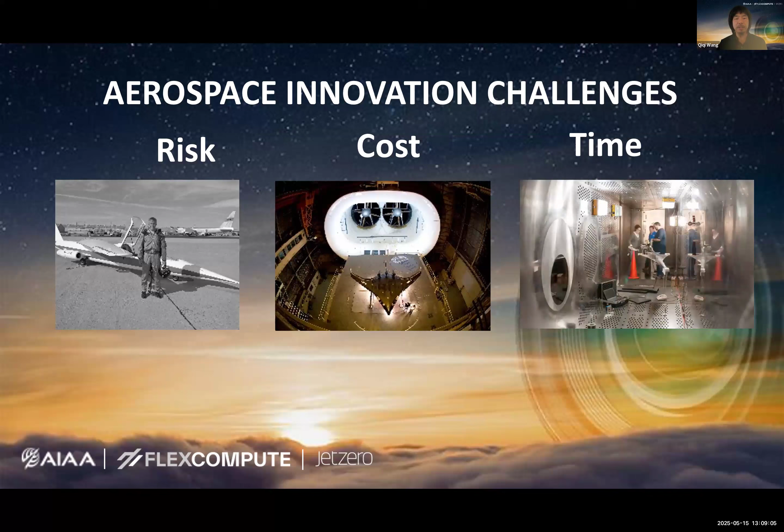The reason I figured was that aerospace innovation is really challenging. It is very risky. I mean, a lot of very good people lost their lives testing innovative airplanes. Innovation costs a lot of money, and those working on hardware understand that innovation in the aerospace industry just takes an enormous amount of time. And the dream here at Flexcompute is really to deal with risk, cost, and time in aerospace engineering. And the dream is to make aerospace innovation as easy as software innovation.

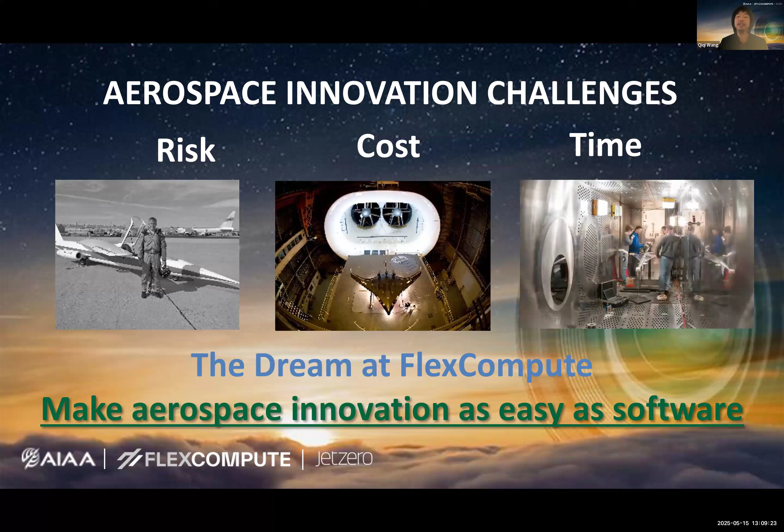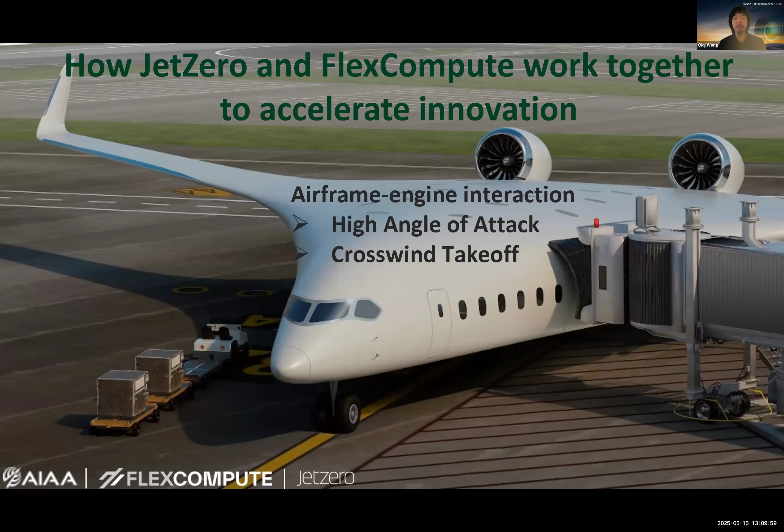So here, I'm just going to be using the example of our collaboration with JetZero to illustrate what we are doing to try to make aerospace innovation as easy as software. For example, a lot of innovation has huge advantages, but also has risks to address. What JetZero is doing, putting the engine at the back of the fuselage, has enormous advantages, but there are also questions to be answered, especially of airframe engine interaction. Is the engine ingesting separated flows at high angle of attack? And when would that happen? And how about crosswind takeoff? What is going to be the interaction with the boundary layer at the back of the fuselage?

So again, this highlights that what we do at Flexcompute, using the most innovative GPU technology, is to de-risk innovation, and as a result, accelerate design iterations of the methods of dealing with potential risks of innovative designs. And as a result of these fast design iterations, optimize the cost efficiency towards net zero. We're in a unique position to reduce the carbon emission of the product you design yourself and during the design process of running the simulations.

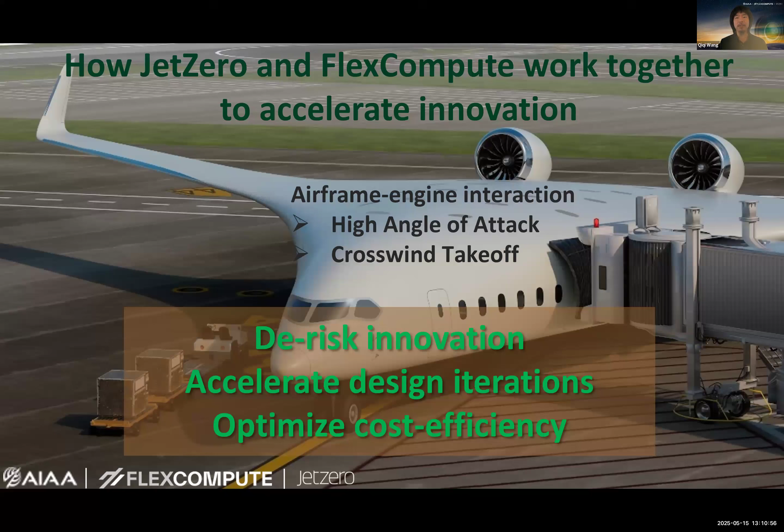So let's first get into airframe engine interaction at high angle of attack. This is something John Vassberg just had a phone conversation with me about one night, and we just figured, how about we run a fully unsteady simulation like this? Really, virtually inside our CFD simulation, test fly a 1/16 scale test vehicle as it pitches up, starting from a low angle of attack to higher and higher angle of attack.

So now you see that the flow separation actually starts from the trailing edge of the outboard wing, and as the airplane pitches up further, the separation moves towards the leading edge. And this is way after stall, which happens at around 14 to 15 degrees angle of attack, before the separated flow gets massively ingested by the engine of this 1/16 scale test vehicle. So doing simulations like that really helps figure out the risks of innovative designs like that, and get the solution ready before the full-scale vehicle actually shows any phenomenon that needs to be dealt with. And this work is done by Thomas, who is shown over here.

And the same goes for the next work, which is the engine installation effect at the crosswind takeoff condition. So this is another simulation done by Thomas of how the engine operates when sitting on the ground, which means there is no forward speed of the engine, but there is high crosswind coming from the side, and the engine operates at takeoff thrust conditions.

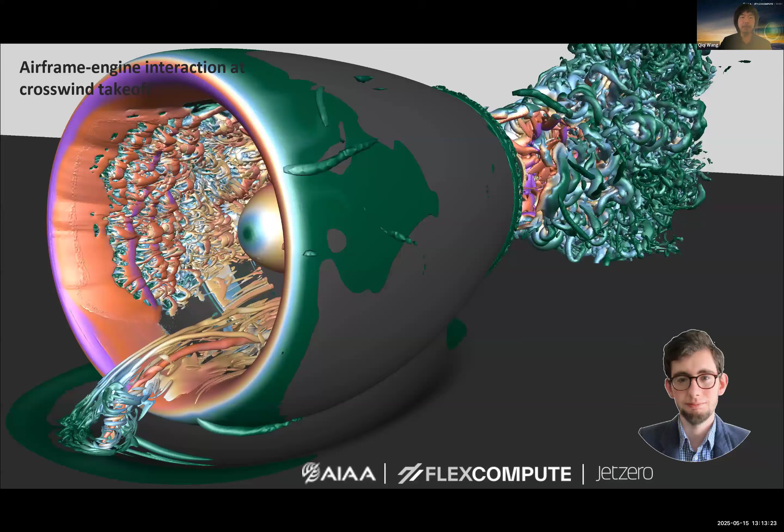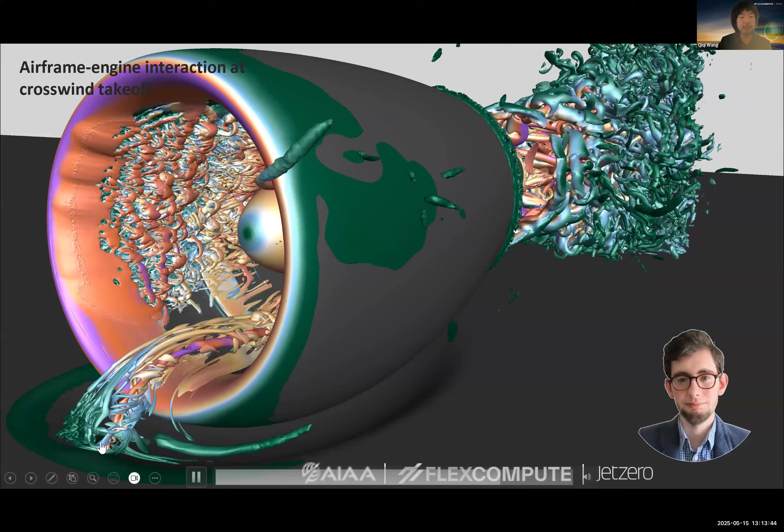And we here have a more zoomed in view of what is happening. As you can see, there is still one strong vortex at the center. If you look very carefully at the purple vortex, it's a very strong vortex that gets sucked into the engine, and that vortex also dances around. Around these very strong vortices, there is also a system of weaker vortices that also gets swirled into the jet

engine. And doing this kind of simulation helps us quantify exactly how big the potential problem is, and very quickly design our system away from any problem that might be harmful. And having a GPU-native simulation, sorry? Qiqi, do you mind if I interject a couple things here?

Of course, go ahead. Yes, so what we saw in the previous animation with the aircraft, that was our 1/16 scale low Reynolds number vehicle. The airfoil stack on that is nothing similar to what we're actually flying for the full-scale demonstrator. But we have this opportunity to look at the flow separation patterns, and we'll be using this model to test out vortex generator patterns as well as vortilons to figure out how to control our stall characteristics and post-stall characteristics.

If we go back to the propulsion animation here, we knew that this was going to be an issue, so we started looking at this problem even before we started collaborating with Flexcompute. But simulations like this show us the issue, and then we go and invent technology to go tame this issue, which we have done. We won't be showing that here today, but these are the type of simulations that a lot of people in the industry don't realize that you have to do to get an airplane with some operational capability.

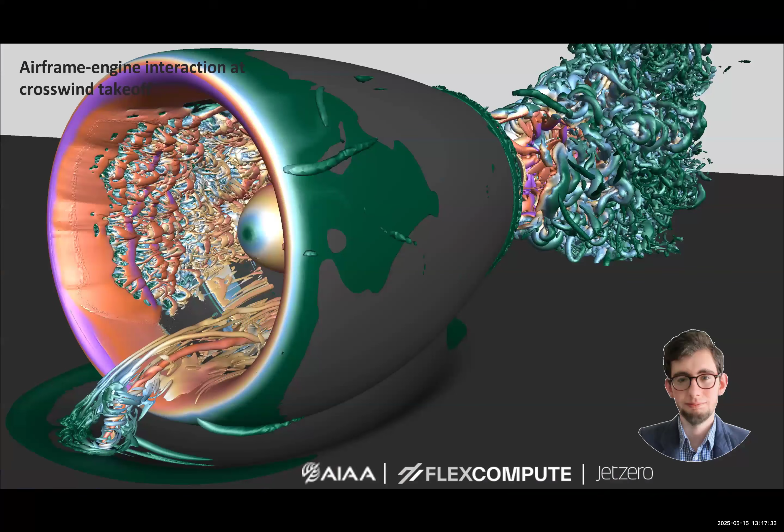Qiqi, are you available to take a few questions at this point? Yes, please. Okay. There is one question here. Are the engines' center line parallel to the aircraft center line or offset by a small angle? I guess that would really be a question for me. And the engines that you're seeing in this 1/16 scale model are parallel, but that isn't to say that the real airplane will be. So. Yeah, thank you, John. Yep.

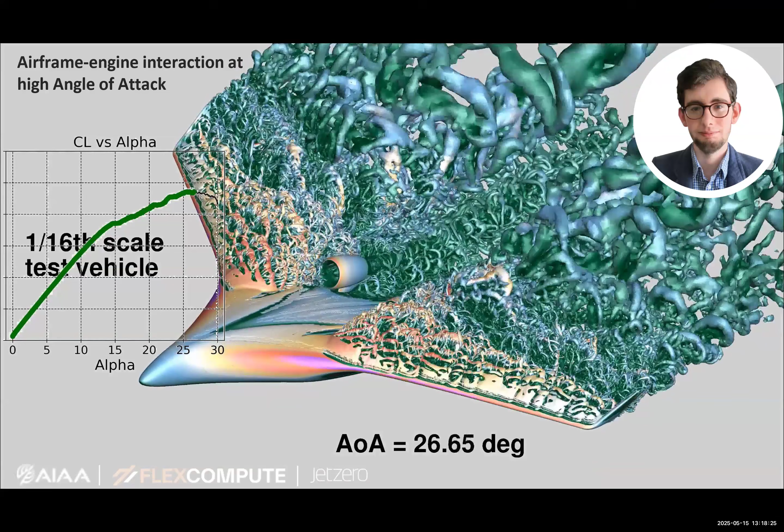Certainly. These questions may not necessarily be in order, so I apologize for that. But one individual is asking max separated flow is. So it sounds as though they would like an explanation on max separated flow. Max, I'm not sure what you're referring to. Yeah, it's somewhat cryptic in the Q&A. So I would invite the individual that posted this to resubmit, and then we will attempt to answer that live for you. So thank you.

The next question is, is your CFD GPU-optimized code open source? It is not. Understood. Do you want to go into any explanation, Qiqi, on why you are keeping that closed? And is it related to trade secrets and that kind of thing, just to give a little context to your response? Yeah, basically that allows us to provide the best service to our customers, such as JetZero. Absolutely. Thank you.

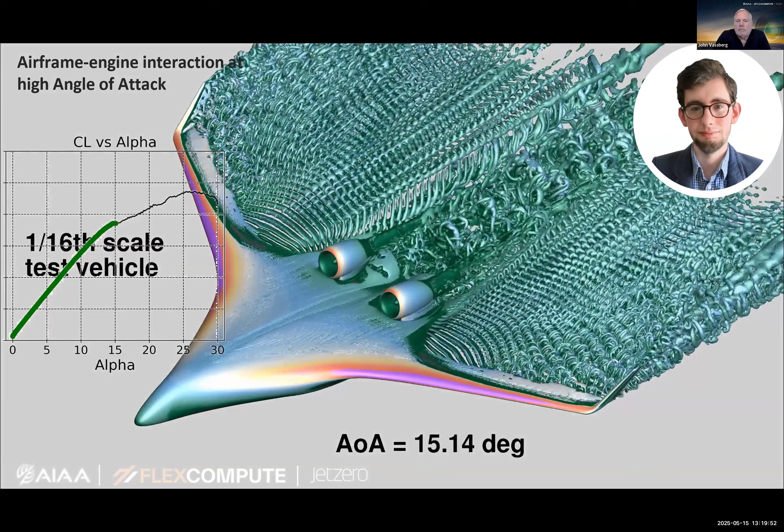Next question is, we recently witnessed a commercial airline crash in a flat spin, uncontrolled descent. What characteristics of this blended wing design might promote this tendency? Well, let's see. I don't want to speculate on what happened with the other incident, but we have to certify this airplane just like we would certify any other conventional transonic transport. So there are no rule changes that we're requesting from the FAA. The regulations are the same. We will design and have to certify to those same regs.

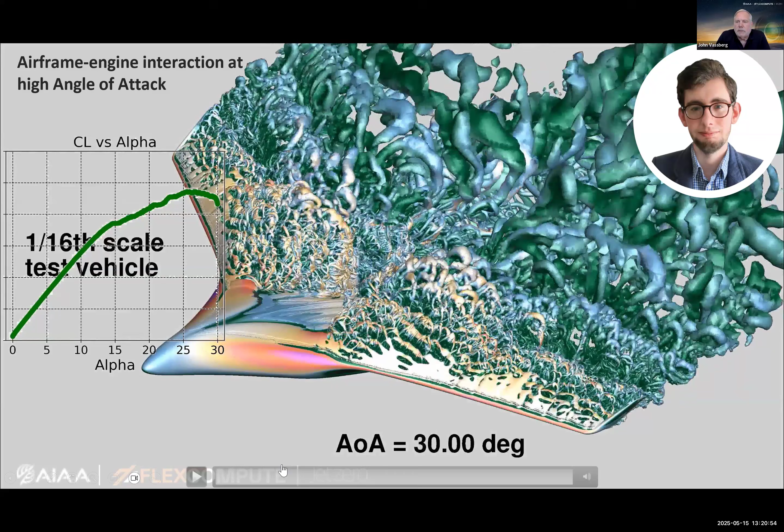Our airplane, well, I will not put my name on an airplane that's not safe to fly. So we're working those issues. And I guess what I would also like to say is that we have these flying test beds so that we can go, like in this particular case, the separation here starts out at the wingtip and moves inward, whereas on our full-scale high Reynolds number vehicle, flight Reynolds number vehicle, we've tailored the separation to start more inboard, just like we would on any other conventional wing.

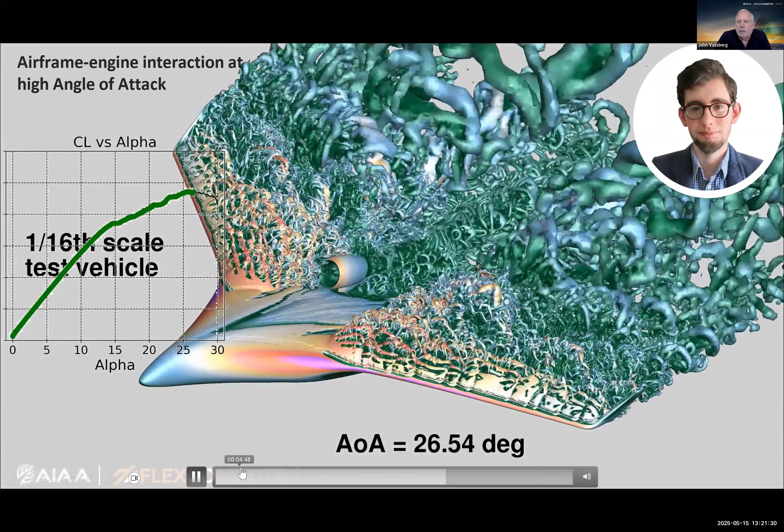I really don't know much more to say on that, other than there's a bunch of us working here at JetZero that have many decades of experience, and we're very much aware of what we need to do to get this aircraft certified. Absolutely, John. Thank you for that. We know that safety is priority number one. Yes. Across the board, and we appreciate and know that you all are supporting that for the industry.

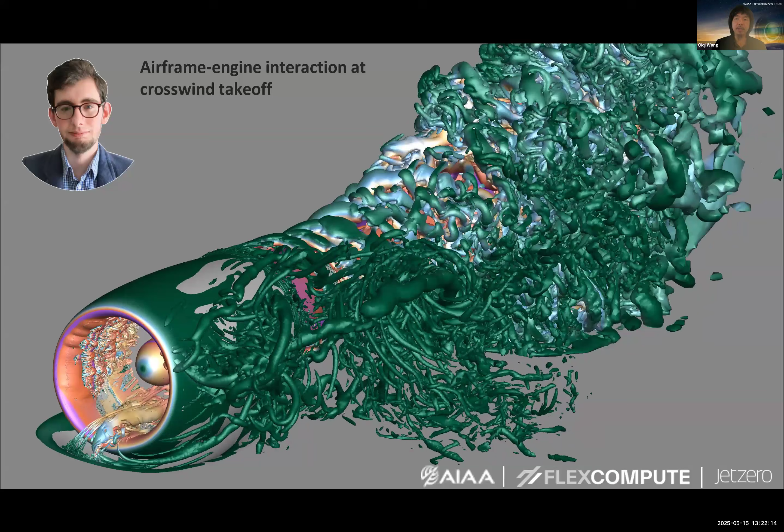Next, I'd also want to add that a lot of the simulation and analysis, the de-risking Flexcompute helps our customers do, is related to safety, right? So we have many other customers, for example, who are concerned about the landing of their aircraft. What we do is we can actually, in a simulation, fly through an entire landing process at various windy conditions, and that basically helps you de-risk potential safety problems. Yeah, this helps innovation a lot.

Outstanding, thank you. And I'll add one more thing to this, is that in any kind of aircraft development program, we have to collect tens of thousands of data points throughout the flight envelope. And at JetZero, we're leaning heavily on numerical methods. We will still have wind tunnel tests. In fact, we're going into our low-speed wind tunnel test in just a few weeks. Our high speed will be later next year.

But with Flexcompute and GPU enabled, it allows us, even in the early development stages of a product, to run thousands of points. We don't necessarily need to run the 10,000 or more set of points for the final aircraft, but understanding where we need to study the problem in our early stages of design really helps us avoid having any of these surprises. We certainly don't want to be surprised when we get into flight tests. Nobody does.

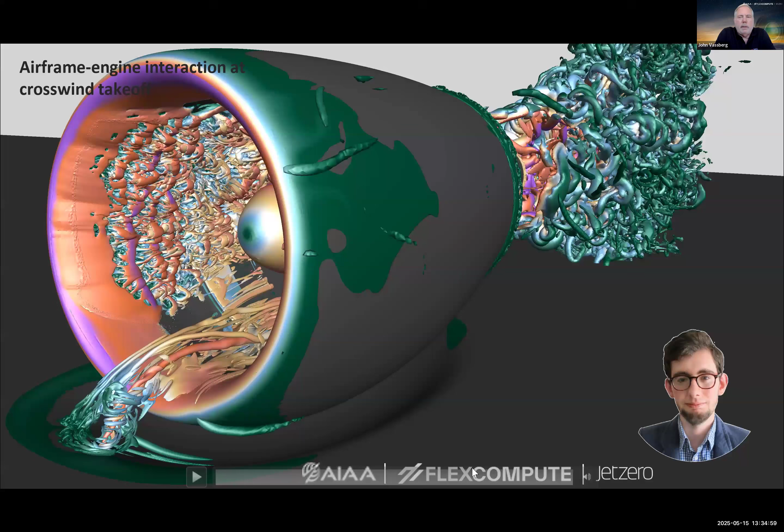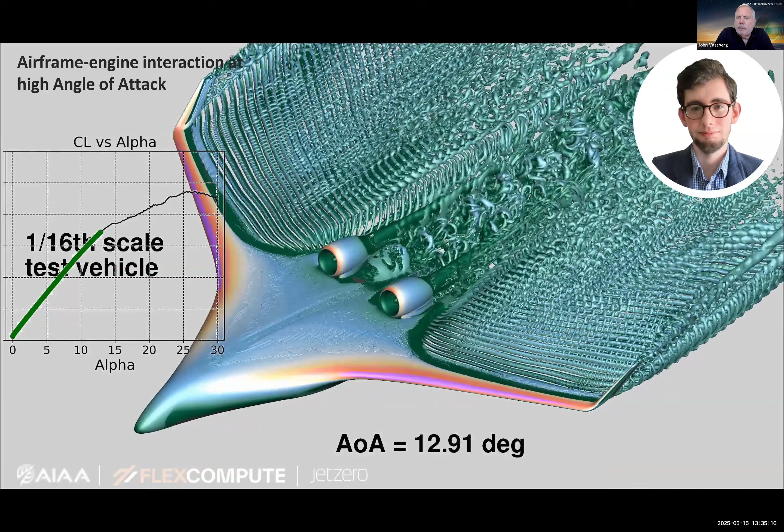Well, I'll tell you, Qiqi, while you were going through that, I was thinking back on the solutions that we did show. And I do want to point out that the cases that we are showing are extreme cases. If we showed the in-flight conditions, it'd be boring. There'd be none of this turbulence and stuff going on. For example, on the propulsion airframe, well, the ingested vortex of the other video.

Yeah, this one. We're sitting on the ground, 0 speed forward, waiting to take off on our takeoff roll, and we have a large crosswind coming directly 90 degrees from the side of the airplane. Even at these conditions, first off, I've mitigated the vortex ingestion, but once we start rolling, we shed that ingestion into the engine before we rotate.

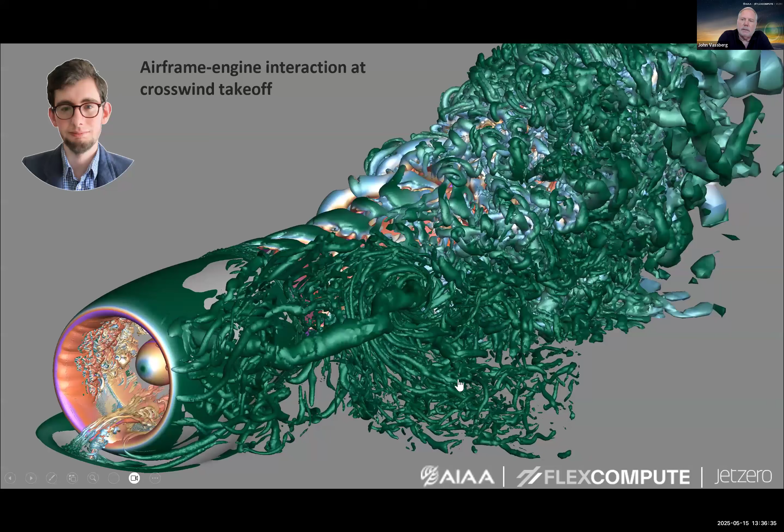When we rotate, this engine is at full max takeoff thrust. It's drawing as much air into the inlet as possible. And we are working the propulsion airframe integration in such a manner that even at that rotation point, which is the most difficult point for keeping the aircraft's boundary layer out of the inlet, we keep the distortion at the fan basically 0.

In fact, we're able to get to points where the distortion at the fan face or the aerodynamic interface plane is less than on a conventional airplane that just does an over rotation with an engine hanging out in front of the wing, under the wing. Now that isn't so much because we're better designers. It's just that the situation with this installation is different.

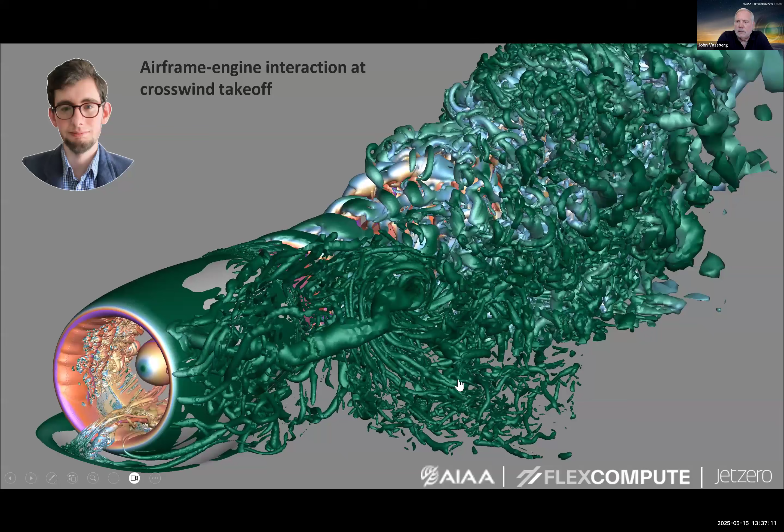The airframe itself actually is a big turning vane. So that inlet sees basically the same condition, whether we're at 2 degrees angle of attack or 10, and whether we're at 0.2 Mach number or basically cruise. So the conditions of the engine are a little bit different, but in some sense, that is an easier problem than on a conventional aircraft. What we're doing here with this semi-buried engine makes it very difficult. It's as difficult as some of the aircraft out there that have very close coupled engine to wing installations. This is very similar in that respect.

But we have the confidence with the CFD, the methods that we're using, the rigor that we put into the mesh quality, the rigor that we put into mesh sensitivity studies. A lot of this is stuff that we've been trying to teach through the drag prediction workshop series and high lift prediction workshop series at AIAA. I was part of starting that in the year 2000. So here we are at 2025, 25 years later, we're still learning, but we have a wealth of information, understanding and experience on how to deal with these very tough problems and tame them with innovation and intellectual property that's unique to this airplane over the others.